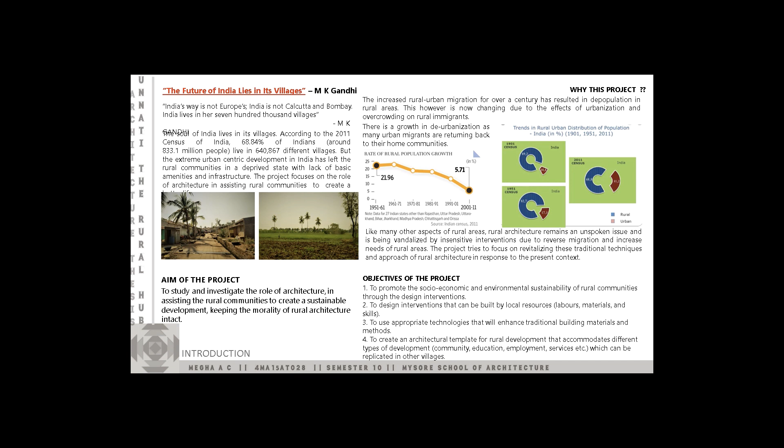The objectives are to promote socio-economic and environmental sustainability of rural communities through design interventions, which can be built using local resources and appropriate technology.

A brief study of villages is carried out to understand the various factors affecting the physical or social form of villages. Also, the self-sufficiency of villages is being studied.

In the present days, there is a sharp decline in agriculture and non-farming activities are emerging in rural areas. Despite rise in economy, the village lacks improvement in basic facilities. Hence, we see various organizations involving themselves in rural development along with the government, like NGOs, institutions, and CSR projects.

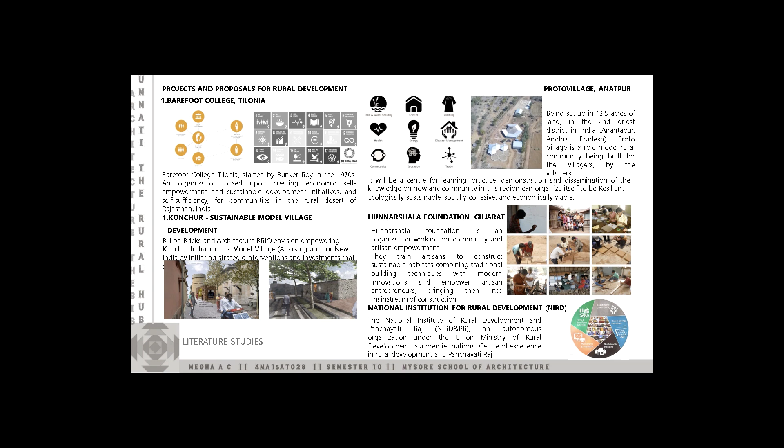Many projects and proposals are coming up in villages which focus on providing basic facilities, creating self-employment opportunities, and empowering rural villages. From the study of all the proposals, we can see active community participation in all these successful projects, and rural development means to educate and train people, helping them create self-employment opportunities.

The building case studies set a good example to know the quality of spaces and the functions and activities which should be included in projects like this.

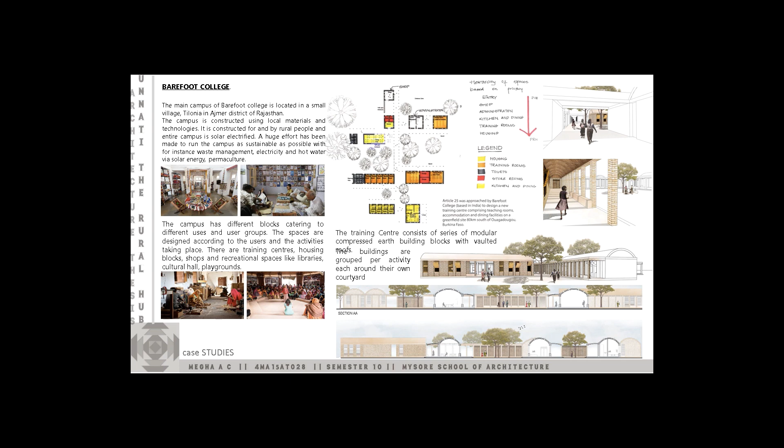They exhibit how local materials and resources can be used in creating cost-effective buildings and spaces.

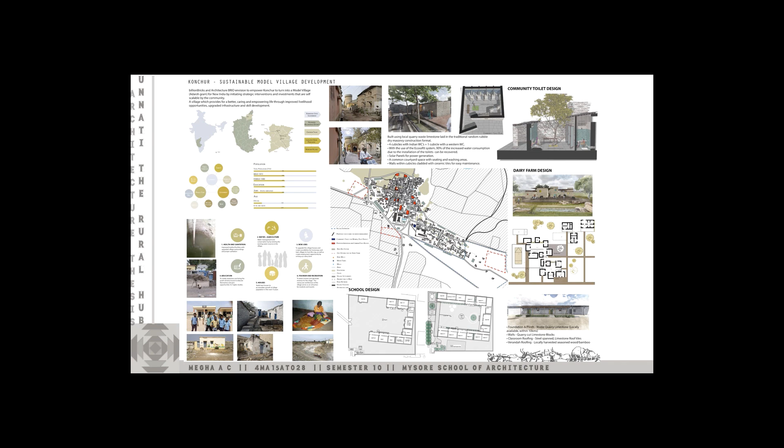The important point from the case studies is how to analyze the needs of rural people and design the spaces required for their needs in a minimalistic approach, using as few resources as possible. These case studies also show us how to integrate the services, making the building sustainable and self-sufficient.

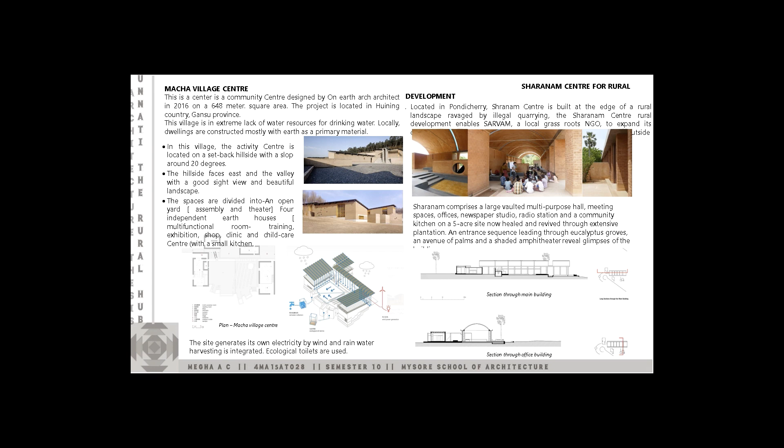Based on the study, examples, and case studies, the idea is to work on a cluster of villages rather than a single one. The selection of Gram Panchayat was based on three criteria: NGO handling project, CSR, and survey.

Going with survey and with reference to Dr. Nanjundappa committee report, which identifies backward taluks based on cumulative development index, the Harpanahalli taluk of Bellary district was chosen.

In Harpanahalli Taluk, Punabaghatta Gram Panchayat is chosen as the region for study, which has 10 villages under its administration.

There are two main roads with bus transportation connecting to all villages within the Gram Panchayat, except one or two. The total population is 8,000, with equal numbers of male and female.

The facilities and infrastructure are mostly located in two major villages, Punabaghatta and Kammatahalli. People from all other 8 to 9 villages access facilities by coming to these two villages every day.

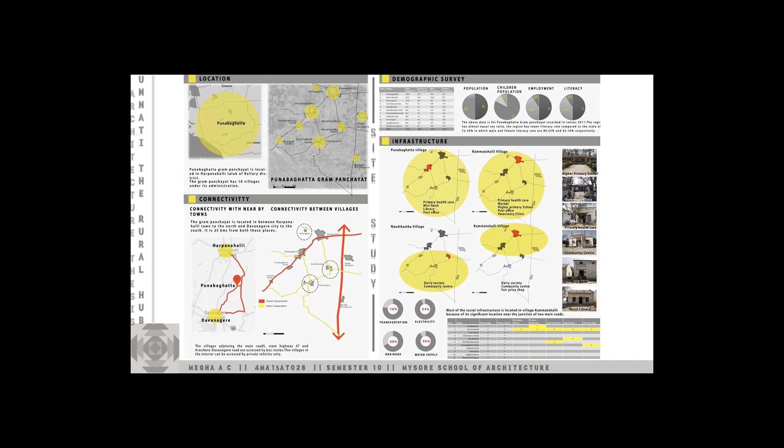The education system at various levels is studied, and the region has schooling only till secondary school. One of the major reasons for unemployment is lack of education and skill in the working age group. Kids should also be provided with skills like arts, dance, and music, apart from academics.

50% of the working population practices agriculture, and the rest practice horticulture, small-scale business, and labor. Lack of education and skill opportunities are the major drawbacks for employment opportunities.

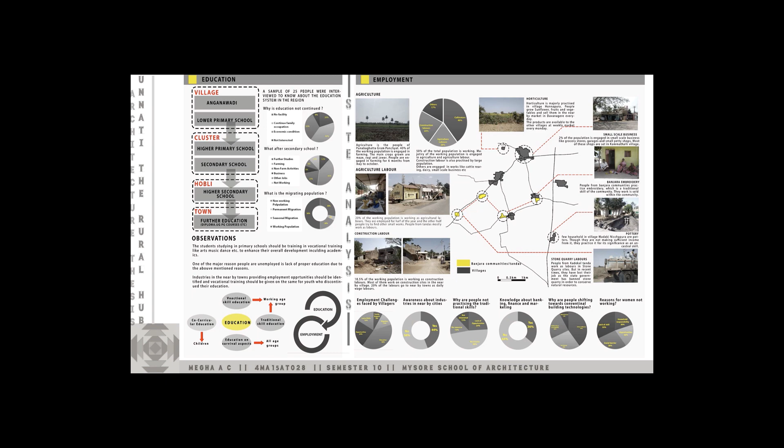Study of public spaces is conducted to understand the social life of villages. Public spaces are very informal and not defined. People usually gather around temples, trees, and small shops at various levels.

The hierarchy of public spaces and user study is also done to understand the quality of public spaces and the users using them. There are two important junctions at cluster level which have gained significance due to the spaces around them. Market spaces and bus stops act as a major crowd puller at cluster level, with interactions happening between different villages. On market days, these junctions have almost 150 to 200 people coming into these places.

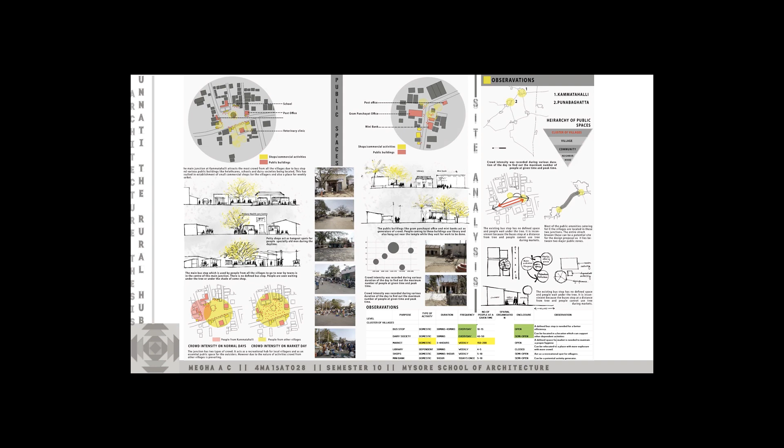Public spaces at community or neighborhood levels are also studied to understand gathering of small numbers and the spatial quality of those spaces. Streets play an important role in the social life of rural people and are the most vibrant spaces where people gather, celebrate and live. The living is mostly extended to these streets and courtyards within the neighborhood.

There is an interesting land use pattern which can be seen in almost all the villages. All the villages have a primary road which divides the village into two parts, one side having all the residential development and the other side mostly public buildings. Also, the layouts of communities are in a cluster form with a temple or shrine in between. People usually gather around these shrines or temples, and that's how social life happens in these smaller communities.

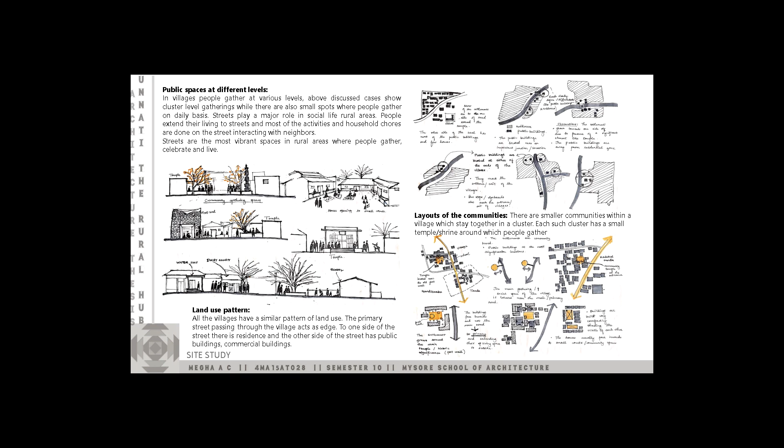A brief study of building materials is done to understand local materials and methods of construction. There are various roof profiles used in the villages, and the commonly used typology is sloping roof with Mangalore tiles and clay tiles locally manufactured in the region. The plinths used say much about the topography and precipitation, since most are at the same level as the street and few are lower, which indicates very less rainfall in the region.

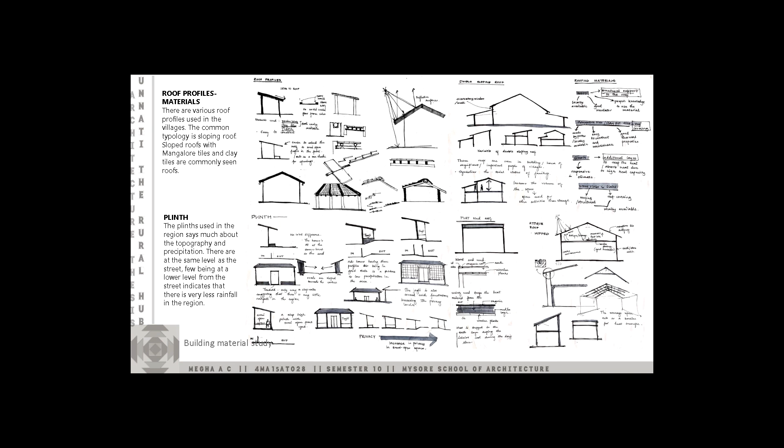The most commonly used building materials are earth and stone. Earth walls are most common because they help keep the building cooler for this climatic zone and are locally available. People also use local random stones to construct the house. The stone masonry walls are 0.5 meter thick to trap heat within the wall. There are small openings at a higher level so that it responds to the climate, and the openings are fixed to stone lintels.

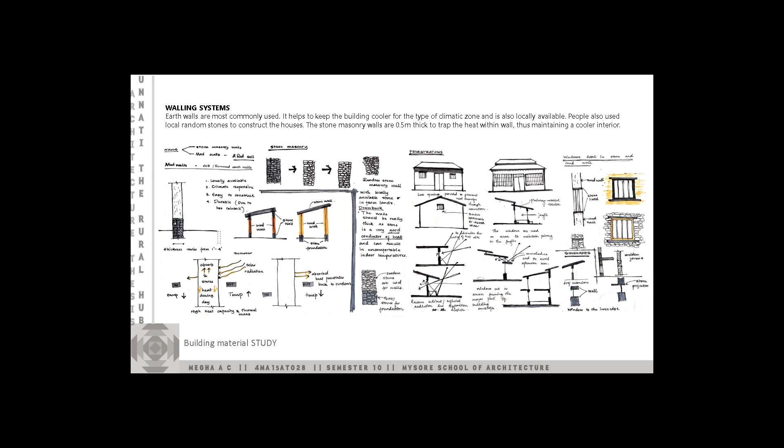Primary users are the villagers, based on three categories: age, occupation, and gender. After studying the region and assessing the needs of people, the design proposals are categorized into two functions: communal activities and training, which help create employment opportunities. Communal activities include markets, shops, and community halls, while training includes a women's training block, vocational skill training, and construction skill training. With this, there are four blocks and a housing block for staff members.

Analysis of spatial organization was done to place the blocks, and there are three types: scattered zoning, clustered or campus zoning, and linear zoning. Two analysis tools, SWOT and weighted average methods, are used, and combining the results of both, cluster organization is the most suitable for the project.

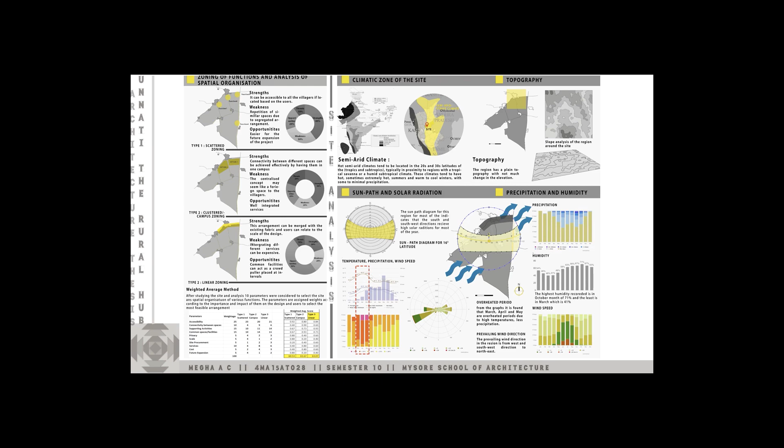The site is selected on the street between Punabhaghatta village and Kamatahalli village because of its extreme importance. The site is selected closer to the main junction in Kamatahalli village and the existing bus stop and market, so that it pulls more crowd and villagers can easily adapt to the market and bus stop and continue to follow the same modes of transportation.

The size and orientation of the site is more of a linear form, almost with two directions, one facing north-south and one facing northwest and southeast. Also considering the sun path and wind direction on the site, the longer side faces northwest and the shorter faces southwest, hence allowing blocks to be placed along the longer side receiving less solar radiation. Vegetation is very sparse with local planted trees like neem, coconut and betel nut.

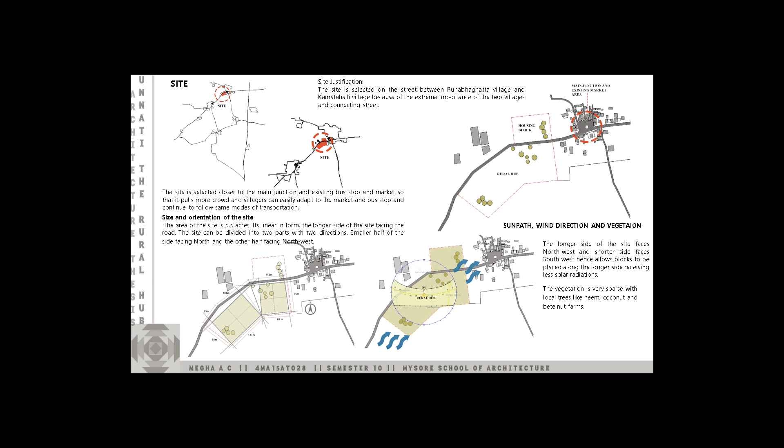The site slopes down from southeast to northwest. The difference between the highest point and the lowest point of the site is 6 meters at an interval of 1 meter. The site has a very gentle slope.

The design has two major components: the training blocks and the community spaces. Based on the study of village land use patterns, since the site has two major functions, it is zoned into two parts, one having training blocks and another having public community spaces.

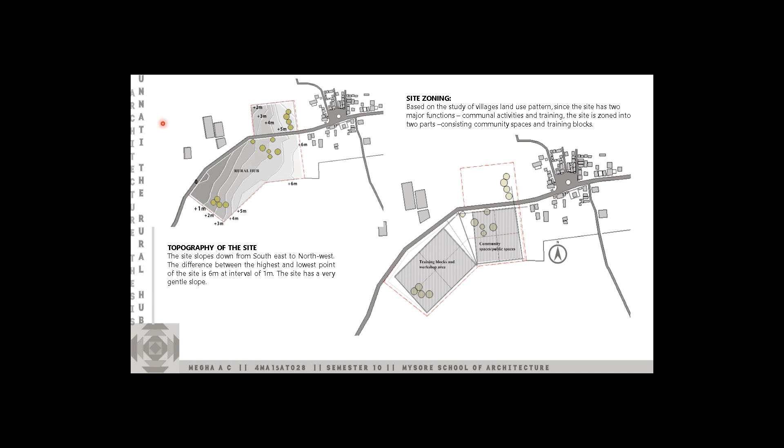Few of the conceptual ideas: placing the block in the southwest direction so that open spaces are not directly exposed to solar radiation. Also, a void space is created in front of the southwest facade to reduce the harsh solar radiation received, used as a passage or corridor with seating, giving a jagali kind of feeling in the rural context.

Building orientation tries to face the longer side in the north-south direction so that less solar radiation is received. The roof form is such that it receives maximum north light, and on the south, solar panels are fixed to consume maximum solar radiation. Openings are placed at a lower level where air enters and at a higher level for exit, so hot air moves up and goes outside, with entry through smaller openings and exit through larger openings.

Site axis: deriving from the site geometry, the site has one primary axis through which all the blocks can be accessed, and three secondary axes which guide the entrance to the site to different blocks.

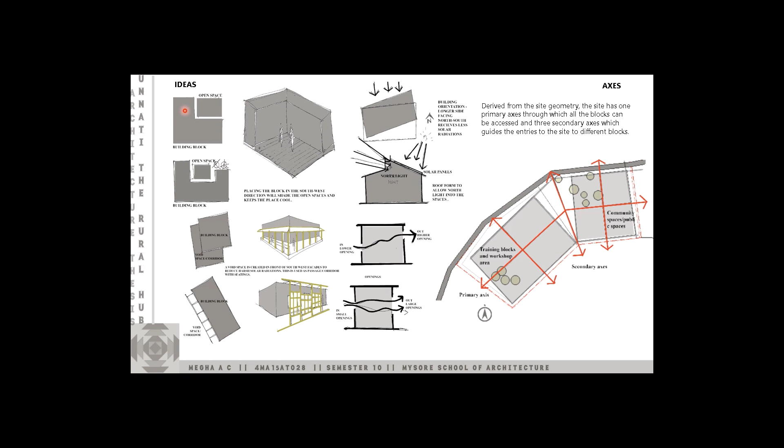There are three main entrances to the site, out of which two are pedestrian and one vehicular entrance. This entrance leads you to the community spaces, this one to a junction through which you can go to training blocks or community spaces.

Combining these two entrances which are closer, a frontage is created in front of the site so that it acts like a public realm where people can sit and wait for the bus since the bus stop is located there, and also can come to the market space which is located nearby. So these are the three site entrances, and the accesses are placed such that they create three important nodes on the site.

The first node is where all the users from the village can meet for fairs and celebrations, at a communal level. Another node is where few users from the training blocks and other users from the community block can come, which has a pavilion in between. Then there is a vehicular entrance closer to the construction workshop, since most of the men use two-wheelers as their transportation mode.

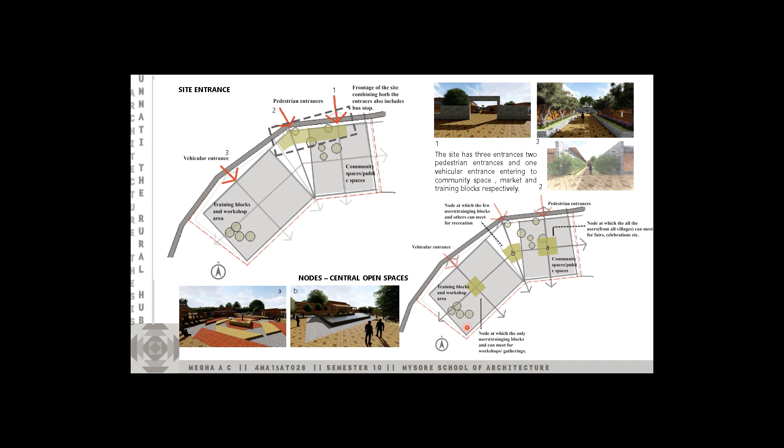The site is entered with a frontage here, in front, where there is a bus stop and people can meet, gather, and also have a glance at all the spaces in the site while waiting for the bus. So the frontage provides the entrance to the blocks. It stretches this long and opens to three different blocks: community hall, market area, and canteen, so it can be accessed by people from the site as well as outside.

There are two entrances from here which lead to two major junctions or nodes in the site, from which individual blocks can be accessed. The entrances are emphasized with stone wall so that it creates a contrasting color among the mud wall blocks. The first central space, a community central space, is surrounded by four blocks: community hall, markets, administration area, shrine and kids activity area, and a playground.

At the end is a water tank and a solar farm with a services block. Leading forward, the second entrance leads to a pavilion, the second junction, which opens up to canteen, toilets and women's block. The women's training block is also placed next to the kids' area so they come along with their kids and have a look on them while they are playing.

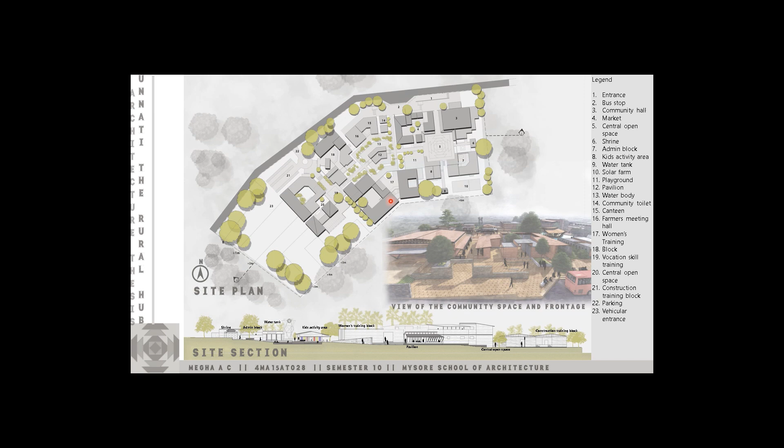There are two main pathways, and at the end of each pathway there is a significant element that has been added. As soon as one enters the site, one sees a water tank which creates a visual impact, since it's placed at the highest point and it's a huge, gigantic structure.

At the end of the other path, there is a shrine which symbolizes the sacredness of the space, or the social importance of the space. So in both cases, one is trying to create a visual impact while another is trying to create a social impact on the users. The spaces are arranged such that there is a hierarchy between the open spaces within the blocks and the open spaces outside the blocks.

So within the blocks, the spaces are arranged surrounding the courtyard or inner open spaces where the interaction happens within the block, people, whereas they come outside and interact with the block people of other blocks. In the interior of the block, semi-open courtyards or small open areas provide a platform for interaction, whereas in the exterior of the site there are small elements which catch people's attention.

There are elements like seatings under the shaded trees or the narrow streets with seatings on either side of the streets and a pavilion with a water body surrounding it, keeping the place cooler, and also these open spaces which upheld the social interactions among the users.

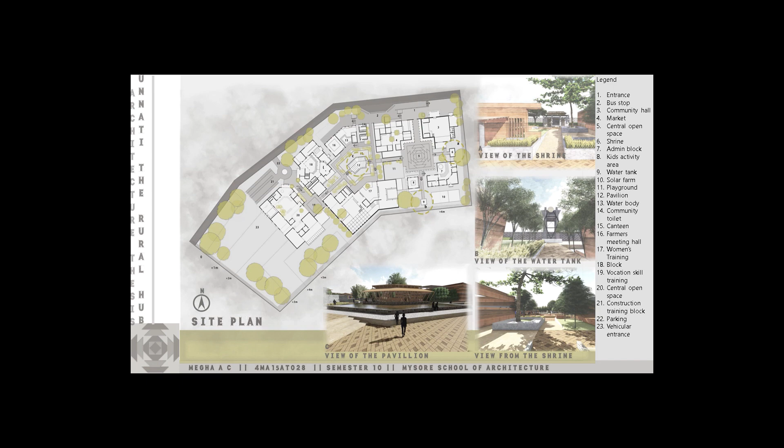This is the market area and community hall area. So there is a separate entrance to the community hall which enters to a porch and then a hall with capacity of 200 to 300 people. And then there is a kitchen with open eating space. On the other end of the hall there is a shrine where people use it for village functions.

The southwest facade of the community hall has a pseudo corridor which will reduce the solar radiations entering the building. Also, the rammed earth walls trap more heat, keeping the place cooler. The structure of the community hall has rammed earth walls and then steel truss with wooden purlins and a Mangalore tile roofing.

And coming to the market area, it's 1 meter below the entrance area, so people climb down. People go down, and then there are two entrances, one at this level and one at the lower level. There is another entrance because these shops face this side, which is a dairy society and a fodder unit.

The shops open to the semi-open area which is in between, which also converts to a market area when it's on a market day. So there are seatings under the trees where people can come and sit, and also vendors can be seated when it's a market area.

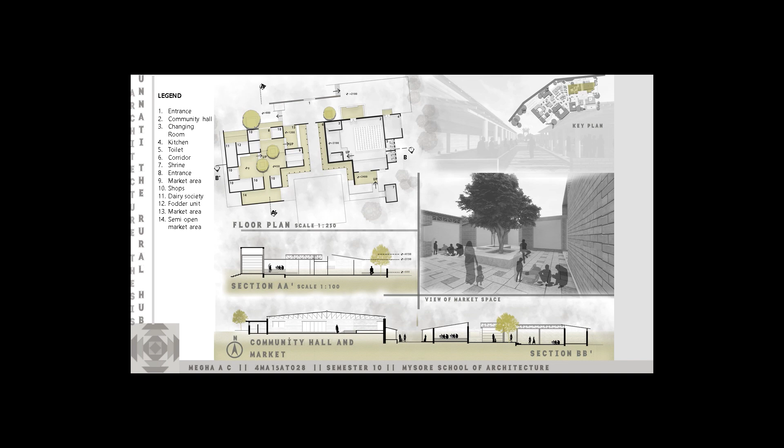The women's training block. So there is a common entrance where people enter to the common courtyard, which is covered with jali walls for privacy. The spaces enter to one workspace and then there is an entrance to the training space.

Workspace is where rural women come and work on their textiles and tailorings. Also, there is a small kids area added so that mothers coming with their kids can leave their kids here so they'll play and they'll have a look on them.

And here there is a training block which opens to a central courtyard so that people sitting here and here can have a visual interaction, and it's not covered by walls. It's just a column structure which is semi open, so this entire area is semi open and it also has staff and toilets.

The workspace is at a mezzanine for both the ground floor and top floor of the training space, so that it's in between. Basically, the lower ground is for embroidery and the upper ground is for tailoring, so women working from both can come here. So it's like in the middle.

So there is a staircase here from the ground floor to reach the workspace next to the courtyard so that the staircase is also filled with light and ventilation.

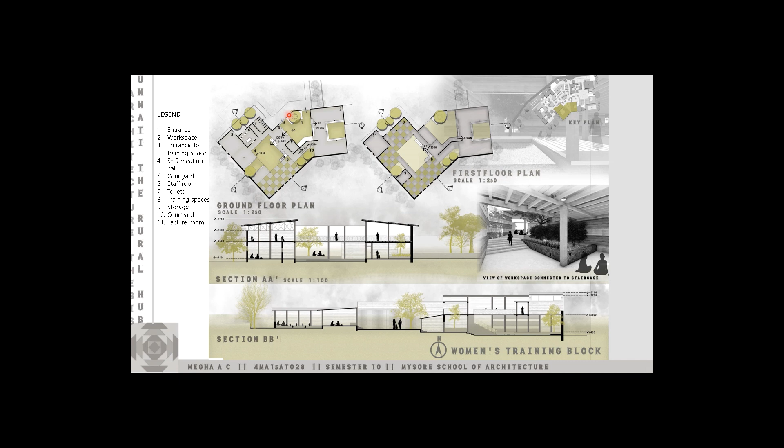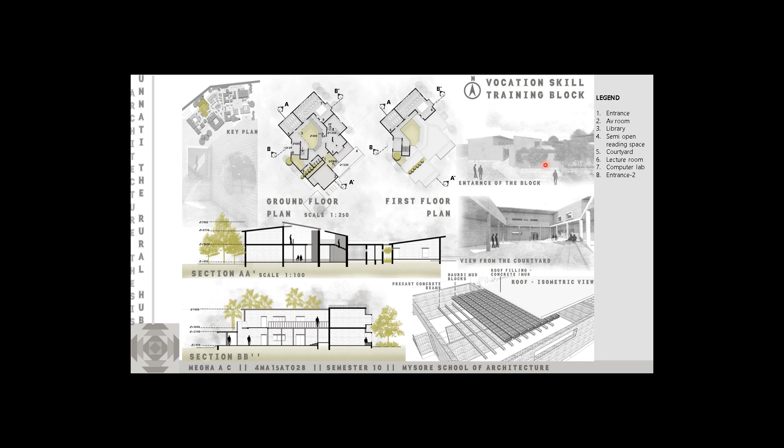Construction skill training block. Again, this block has two entrances, one from the central open space and one from the main entrance. One enters to a waiting lobby next to all the office areas and storage room.

As soon as a user enters the space, he'll see the courtyard. If there are people working, it's a vision of all the people working here, because this space opens to the wooden carpentry workshop. They can also come here and work in the courtyard, and they can work in this semi-open area also, which is at different levels.

This is the area and this is the courtyard I'm talking about. There is also a small canteen for them in this block. They can also have their lunch or something in the same courtyard, so this one courtyard plays a major role in the interaction of these blocks.

There is a multi-purpose hall for workshops, lectures, or any campaigns and meetings held in the block. The next entrance is from the central open space, which opens to the canteen area and is shaded by the tree. Then there is a pathway which leads you to the open yard for the workshop area.

At a higher level, there is another workshop for rammed earth and CSEB blocks, with closed open yard, closed workspaces for small workshops, and then a semi-open area if there is a lot of sun, connected to two storages. So basically the entire block is at three levels, and the roof also follows the level profile.

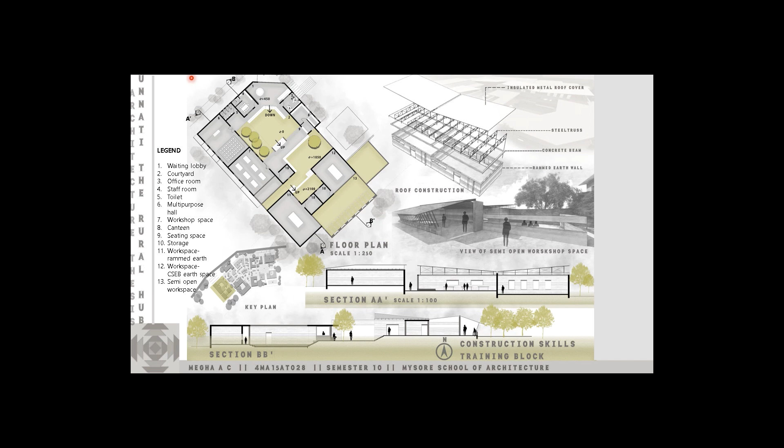The campus is constructed with locally available materials produced on site, and also constructed by local laborers. The campus has training spaces to provide employment opportunities, while the community spaces enhance the social life of villages, hence the rural hub.